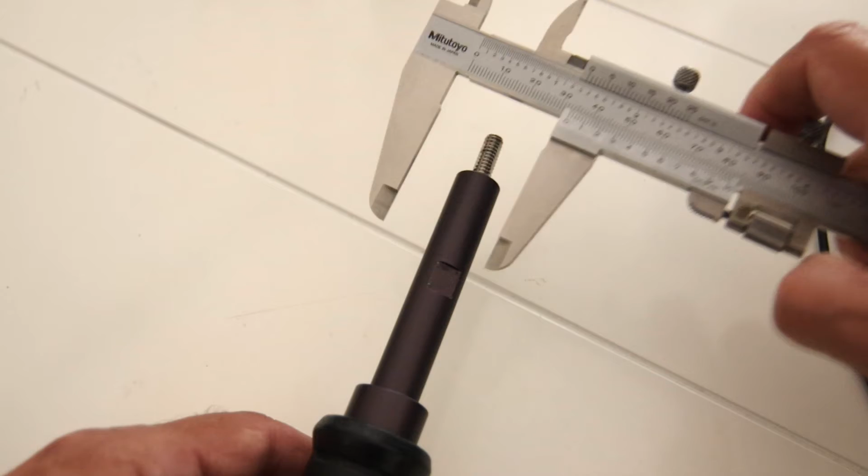I'm going to make the outer dimensions 25 millimeters in both directions, this way and this way. And my phone, with the cover on it, the protective cover, it's 78 millimeters. So we've got 25 by 25, 78, and 15.2 millimeter inner diameter for the hole.

So let's just start with a cube. I usually have my interface laid out like this so that when I'm making something larger I can gauge how it's going to fit into my print volume, but we don't need to see that. I'll also turn on screencast keys so you'll be able to see down here what I'm doing. And let's add a cube.

Cube is 2 centimeters by 2 centimeters by 2 centimeters. Now by default Blender's measurement units are in meters. I change them to centimeters because when I'm working on items or parts I'm making, meters is just too large, so I just change it to centimeters.

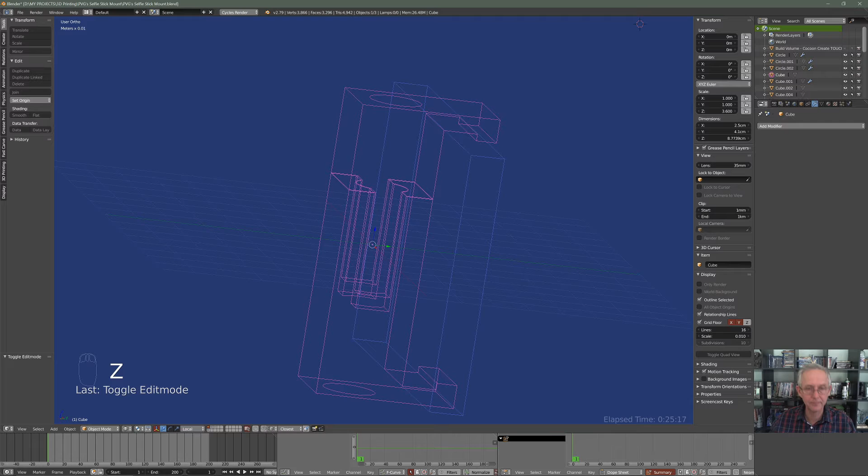Okay, so what's just happened is I've spent a fair amount of time making this up, thinking that OBS was recording, which it was, but it was just recording a blank screen. So I might go back and redo this to show you how I did it. I don't really want to, I'm just running out of time.

So I think for this one, I'm just going to have to explain what I did, and that was to create 2 cubes, 2 20mm cubes, made them 25 millimeters to fit onto this.

So this shaft, I need a 15.2 millimeter hole to cover this shaft here. I'm going to give it 25 millimeters outside dimensions as a cube to go over this shaft, and my phone will mount onto this like so with this bracket I'm designing here.

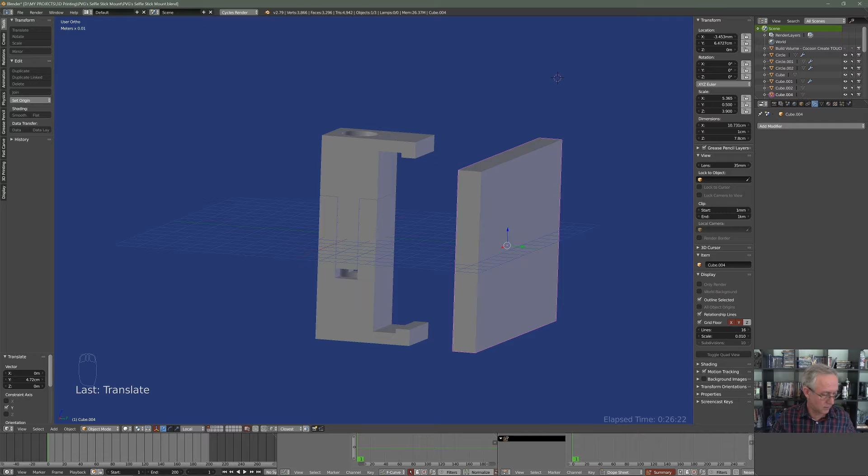I've designed it as two pieces so that one slips inside the other, and there's room here for the two pieces to slide into each other. It's very frustrating, I'm very sorry that that didn't record.

If I get time at the end, I'll redo this to show you what I did. I'm just going to select those two pieces and make them separate pieces so you can see how that's going to work. Both of those will slide over this shaft and then clamp down onto the phone.

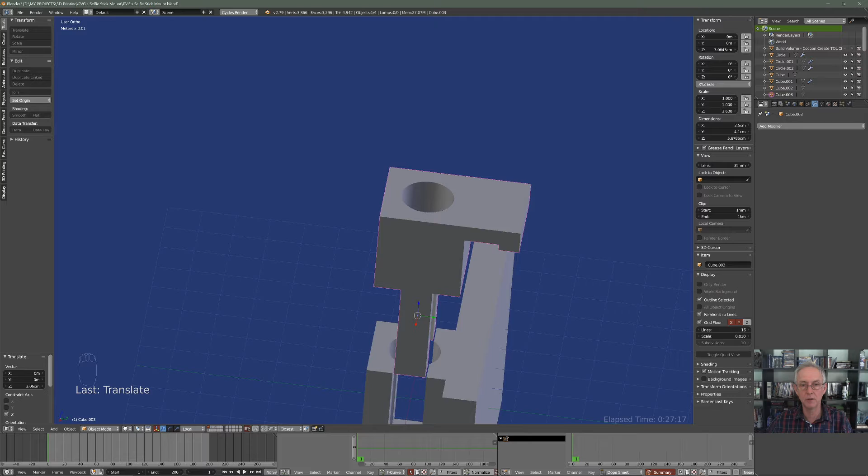Now I need a smaller hole at the top here, because this only needs a 7 millimeter hole on the top to put a nut onto. So I'm going to have to put some geometry into here, building in another cylinder, which I'll do now.

So I'll create a cylinder. I'll make it 18 millimeters diameter, and I'll give it a depth of 5 millimeters.

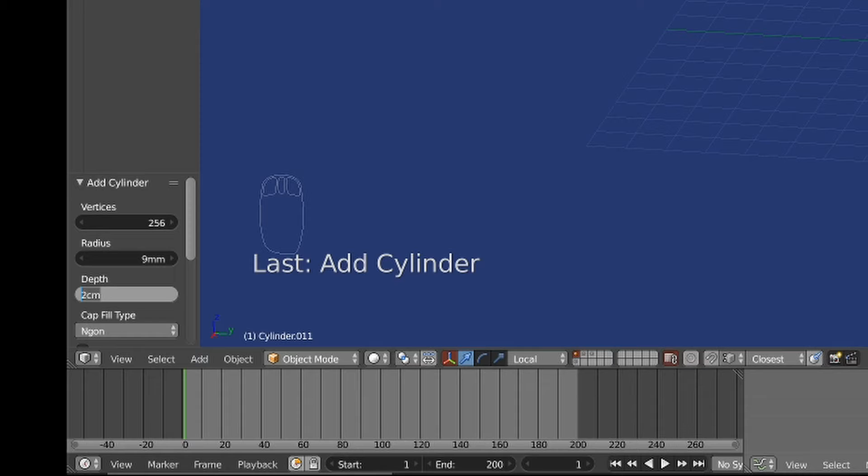And we'll press Alt G. I'm going to snap it to the top of this. Turn on my vertex snapping tool, GZ. Well, now that's snapped in there.

And I'm also going to create another cylinder, and this one will have a radius of 3.5 millimeters to give me a diameter of 7 millimeters, and depth will be 10 millimeters. Alt G, snap it back to 0, and I'll take it up there, and this will be... turn off my snapping tool.

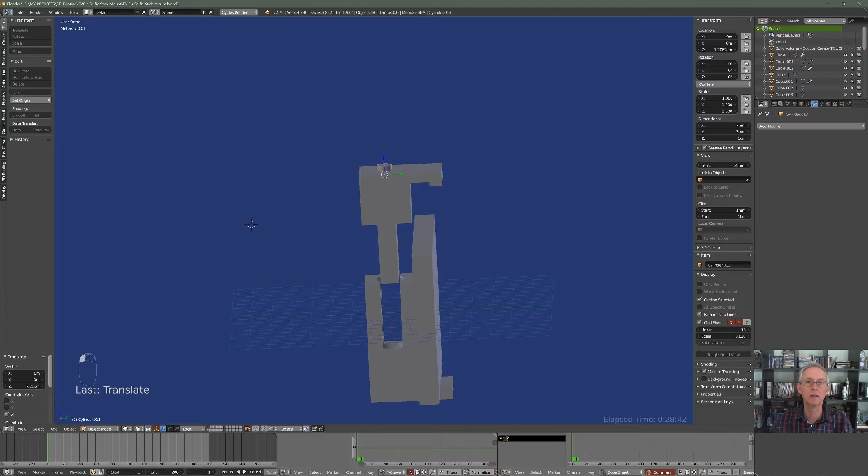I'm going to grab these two pieces, just focus on those. It's just the / key on a numeric keyboard that will focus on what you've got selected, and / will take you back to where you were. So I want to take this piece out of this and then boolean it into the other piece.

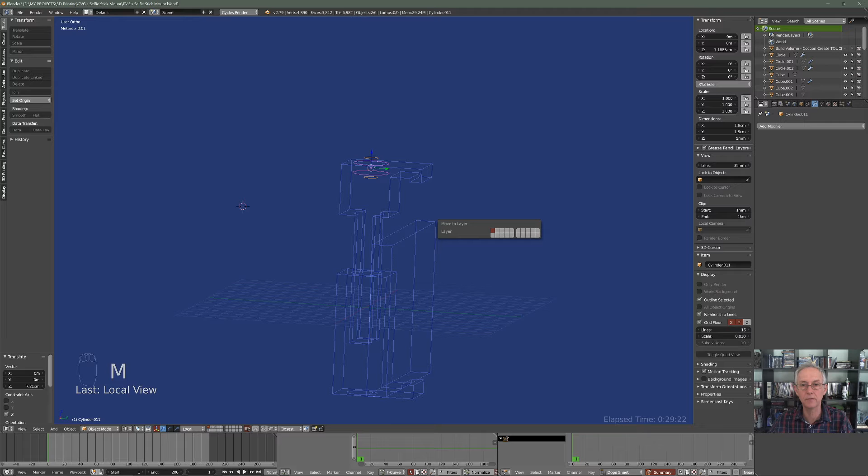So let's see, is there an easy way of doing this? Or another way? I think this might be a better way actually. We'll go back out. I'll move them to another layer for now, so they remain in position. And what I might do is put some geometry in here.

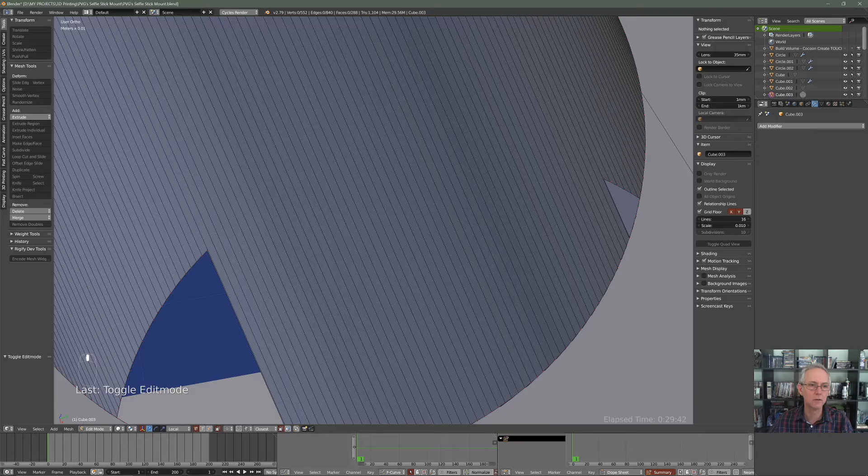First I'll see if I can join these two together. Yep, that'll do, that's fine. We'll do the same here, just pressing J to join those. So now I need to scale them to 0 on the Z axis, SZ0, and same with this one.

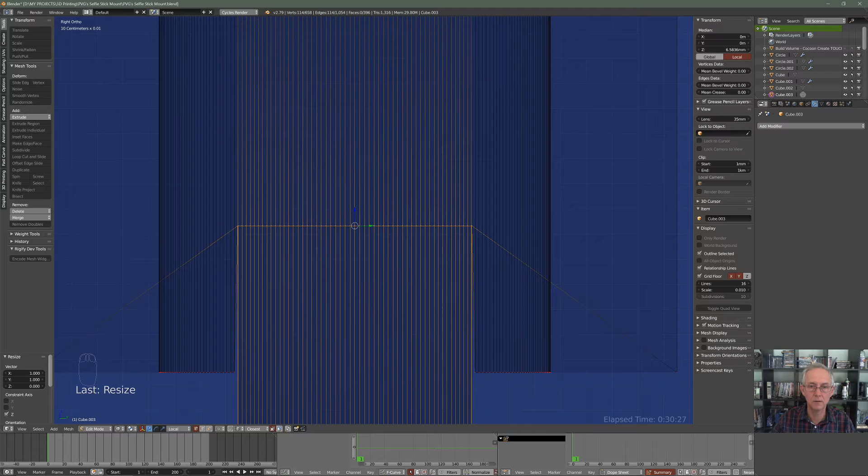Now I need to bring them both down to snap to these vertices so they're back where they were. And they're a bit different, SZ0, they're the same. Turn on my snapping tool, GZ, and snap to these guys. Okay, so now that's got geometry there.

So now I should be able to do a loop cut in here. I don't know why it's not joining up, but we'll have to do the same thing again. And join those. Join those.

There we go. Now I'm going to snap that to this plane here. GZ. Oh, okay. So now I've got some geometry which is holding.

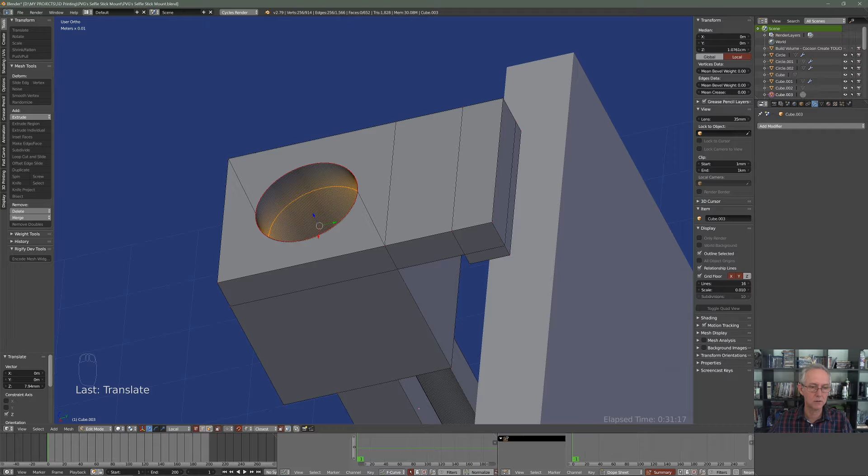What I can do is delete all these faces. And I can select that and fill that, and select that and this and fill that, which means I now can remove these. Control X.

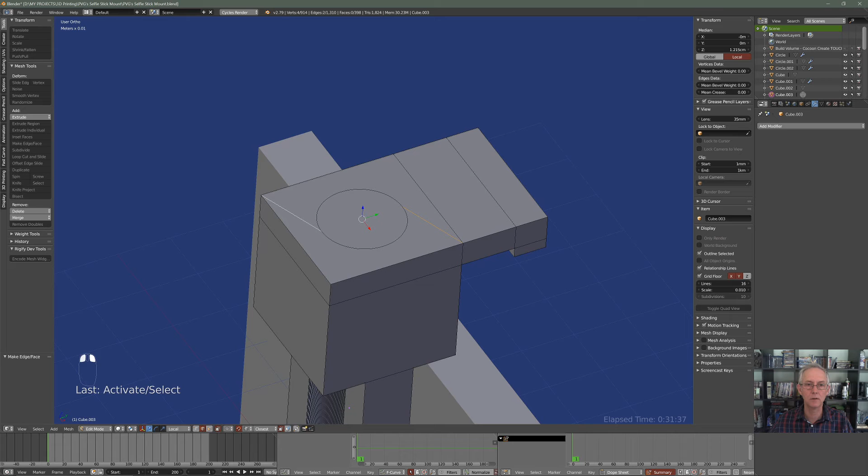So I've got a clean face on top there, and if you're looking through here, there should be a face on here. So now I can just boolean straight through this, and that will work quite nicely. Okay, so now I've got that.

Well, I am going to make sure all my normals are facing in the correct direction. Something you should do when you've been jiggering around and putting geometry in and what have you. Make sure my scale is at 1 on that.

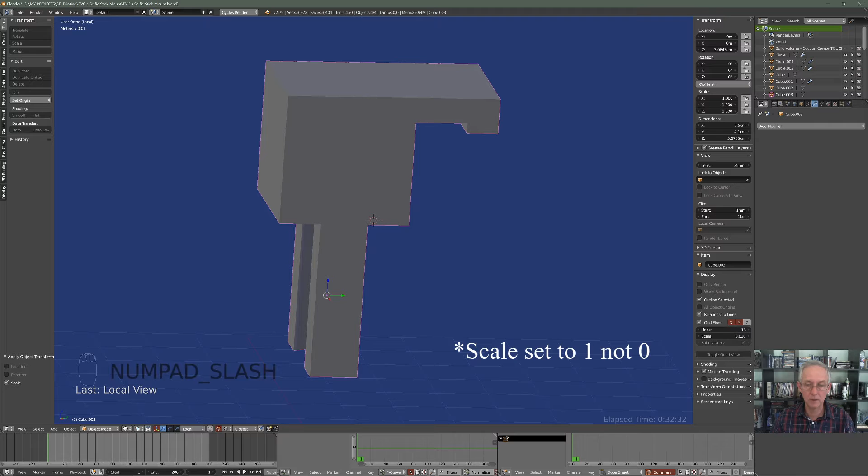I will now bring back my other pieces, or at least just this one here, and move that piece back to the first layer. That's going to be my tool for cutting out a hole in there. Okay, just make sure I'm still recording. I am, thank you. And I'm going to make sure the scale's applied to this cylinder, select this piece, add modifier, boolean, difference, carve, and select this piece as my tool for cutting, and that's now cut it straight through.

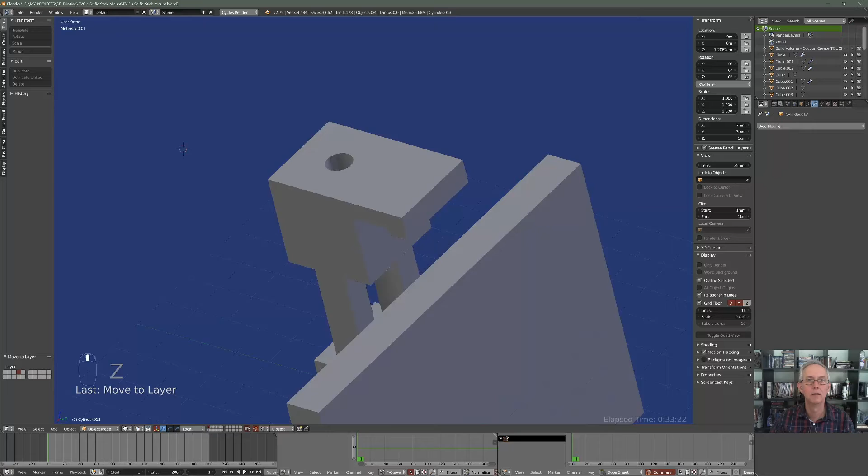So that will then sit on top here, and I can put a nut onto that and just lock it down. Okay, I'm going to apply that, and I can move that tool back to layer 4 so it's out of the way. So now we have our top piece which will lock down, and that should work quite nicely.

And this is just a piece I've got in here to represent the phone dimensions. So it'll come down, whoops, turn off my snapping. It'll come down and just clamp down the phone like that, and I've got a bit of room here, so it will clamp down nicely.

Alright, so I think we're pretty close to being ready to print. I would like to make this look a bit more attractive. That looks a bit ugly, I think. So just going to round off a few corners.

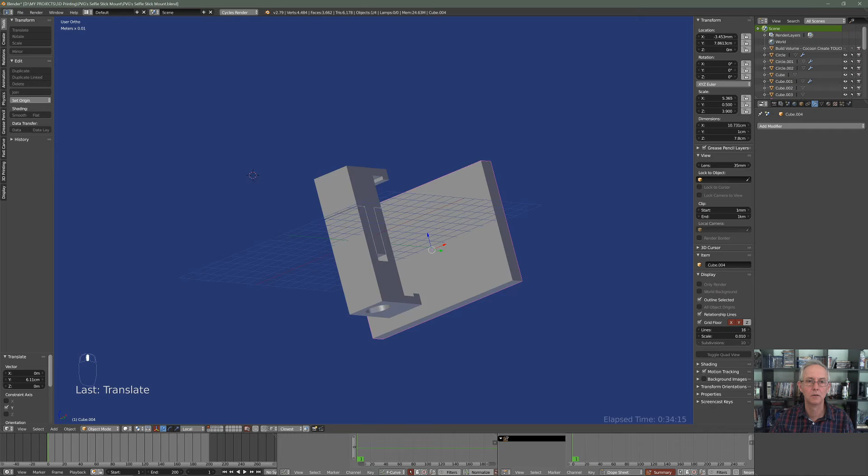I think I'll round off these ones here. Yeah, I think that'll be enough. Yeah, let's just see how that looks. Going to join together and apply to scale and select.

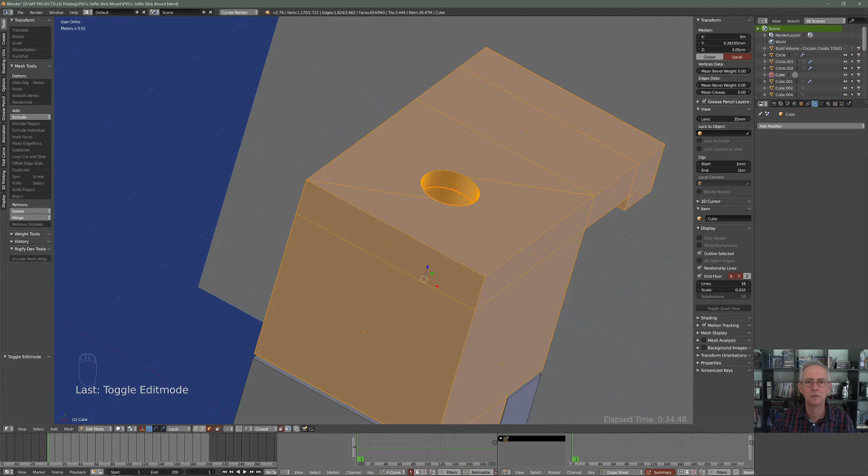Now I want to get, this is going to cause me a problem if I try to bevel. So what I might do is put a loop cut through here and a loop cut through here, and then we'll take this vertice.

Switch to top view, and we'll join that across the top there, which means I can get rid of this one, and we'll do the same here. Join that, which means I can get rid of this one, because that's going to hold that in place. And I'm probably going to have to do the same down.

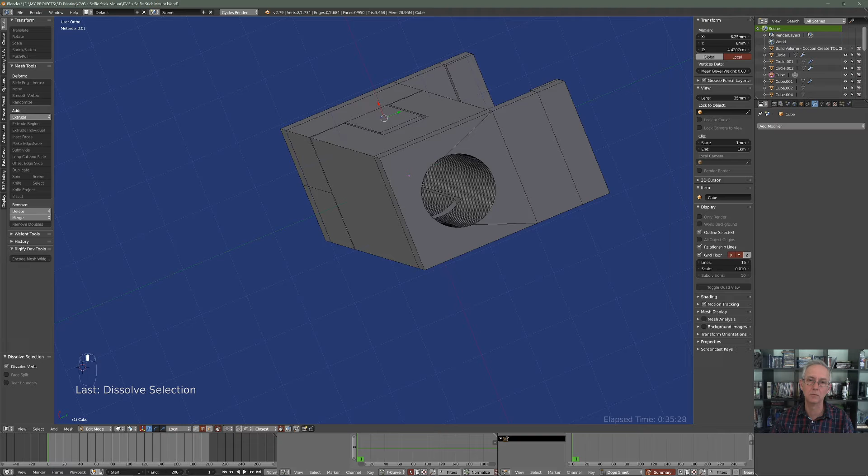Yeah, I'll do it anyway. Just put a loop cut through there, loop cut through there, and I'm going to go Control 7 so we see the bottom view this time.

Make sure I'm on vertices. Join across there. Yep, that's alright. Control 7. And go to there. Join that.

Okay, and so now I can delete these two edges. And that's cleaner geometry. Do a save.

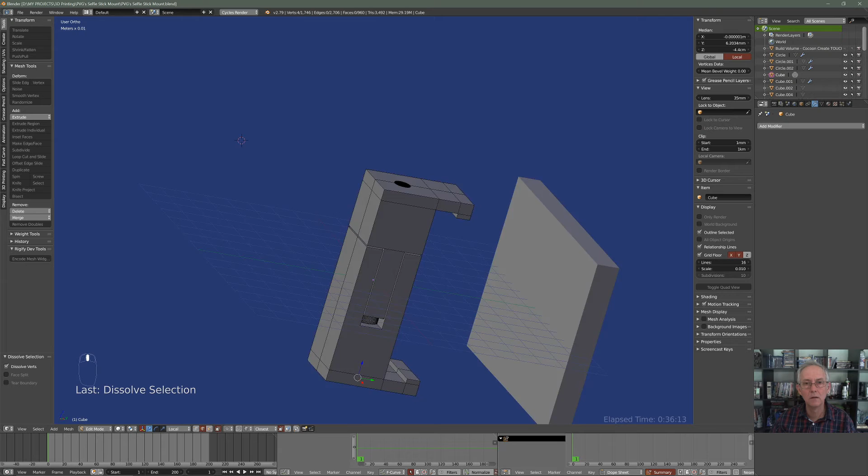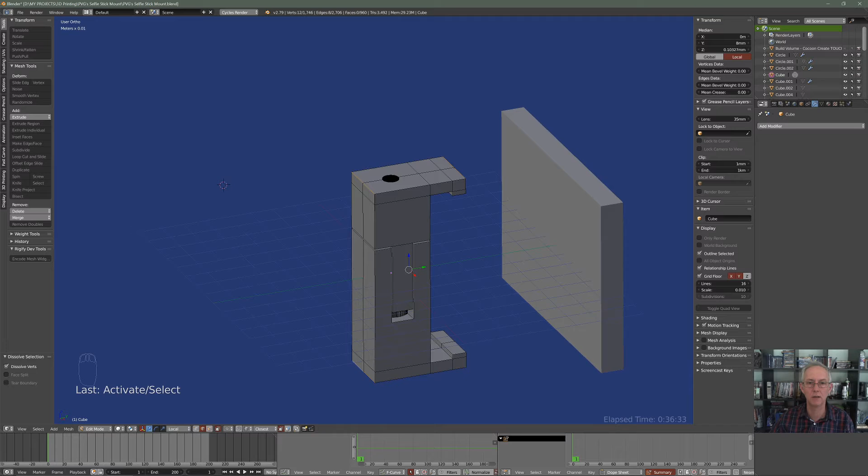So now what I can do is select these edges, and I might use a modifier to do this. I was going to just press Control B and permanently create a rolled edge on there.

But if I use a modifier and use a bevel tool and use weight on these edges, and if I give those a weight, see if I drag that, it's going to give them a 10 centimeter bevel, but that'll be a different scale to what I'm working on here. Let's make it a 3 millimeter bevel, and this is just giving it 100% at 3 millimeter. If I go 4, we should see a difference.

No, looks like 3 is just max. Oh, got to clamp the overlap, that's what's happening. So there must be overlap here somewhere. No, that looks fine. So I could go 4.2 millimeters and still be fine.

And I can also then up the segments. We'll give it 36. And you see it's now put a nice curve onto that shape, which is adjustable. I can go back at any time and change that.

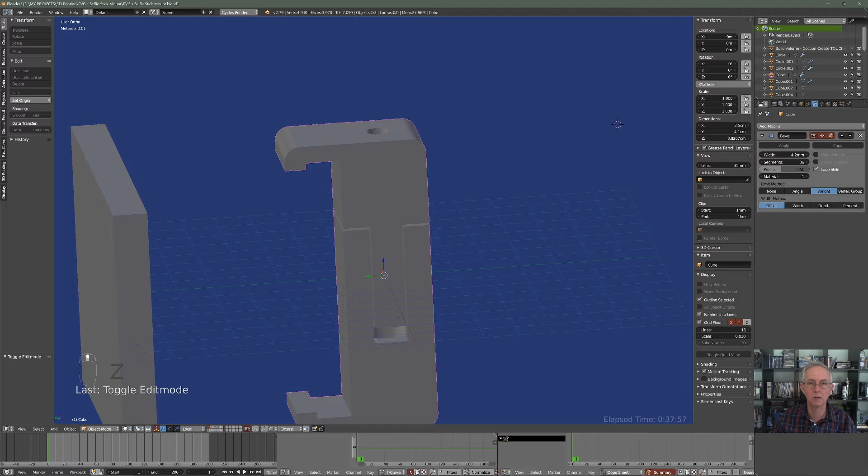Now let's have a little look. I think that's going to be a nice bracket. Certainly going to be sturdy enough. My phone's not going to go anywhere. I'm going to just leave those edges hard inside there, so it's got a good grip. And yeah, I think that'll be good. So we'll print that, just double check everything.

No, I was thinking about separating them, but what I'll do is I'll just duplicate that, move that to layer 5, so I can come back to it, make a change later, and apply this bevel now. Just looking at the sections, how many sections?

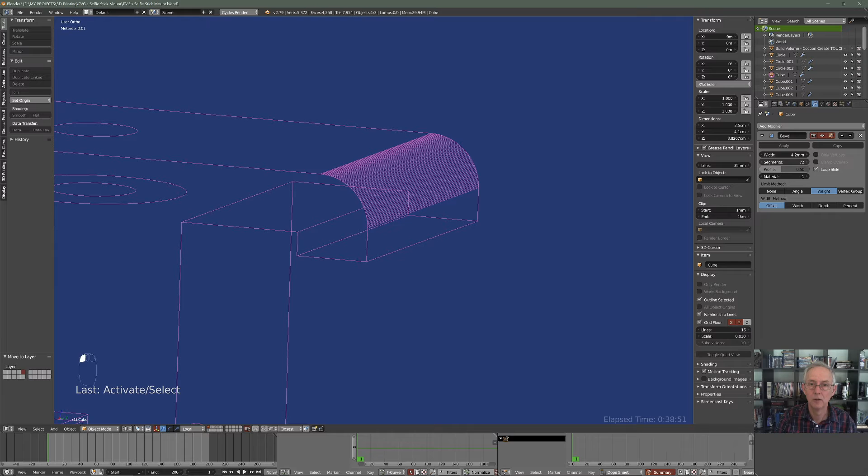I might up that a little bit more. 48. Make it 72, nice and smooth, and we'll apply that.

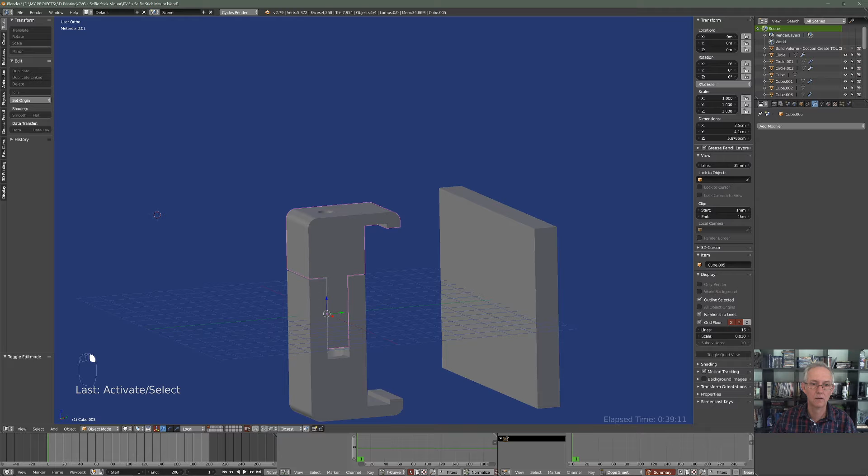Switch to object mode and apply. So now that modifier has been applied, I can deselect everything, link that, separate that off by selection, and move that apart.

Now printing, I think it's going to be easy if I just print them in this orientation as this piece is here, and flip this one over. RX 180, and I'll make this piece, this plane here, the bottom.

Going to move the cursor to selected, switch back to object mode and Control Alt Shift C, and we'll go origin to 3D cursor. I'll do the same for this piece here.

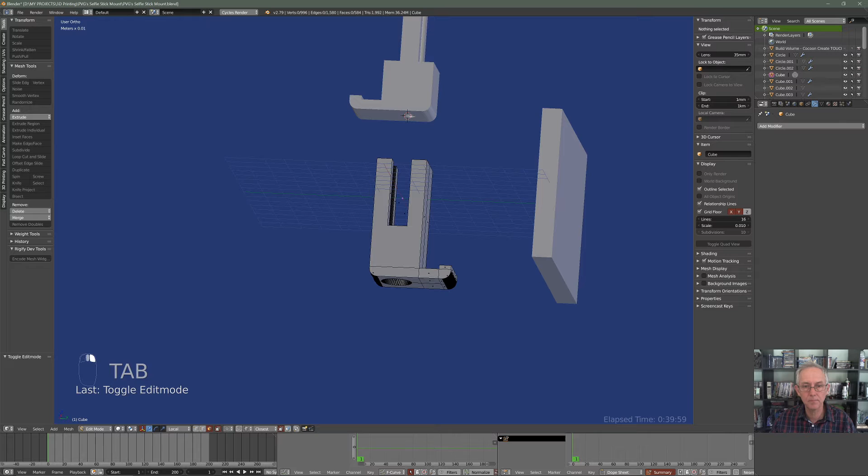Now this is not a tutorial like that I'm expecting you to follow along. This is just showing you how I do it, and you might pick up some little clues on how you can speed up your own workflow.

Now if I press Alt G, that'll snap to the floor. Alt G, so will that, and I can print them as 2 separate pieces or 1 piece, or whichever. And I think we're ready to go. And that's our bracket for holding the phone on.

So let's delete that. Let's take this out to Cura. I did try Cura, actually I'm still recording.

I did try Prusa Slicer. I've been using Cura up to Cura 4.2, whatever it is now, and I did try give Prusa Slicer a go, and I initially thought I was very happy with the way it was slicing and the speed it was printing at. But then I did notice that I did a print in Cura 4 and a print in Prusa Slicer, and I'll zoom in and show you what's happening here.

But for some reason Prusa Slicer doesn't hold the same fine detail that Cura does, and I don't know if you can see these sections in here. This is the SpaceX Starship, by the way, which I modelled. These sections here hold up

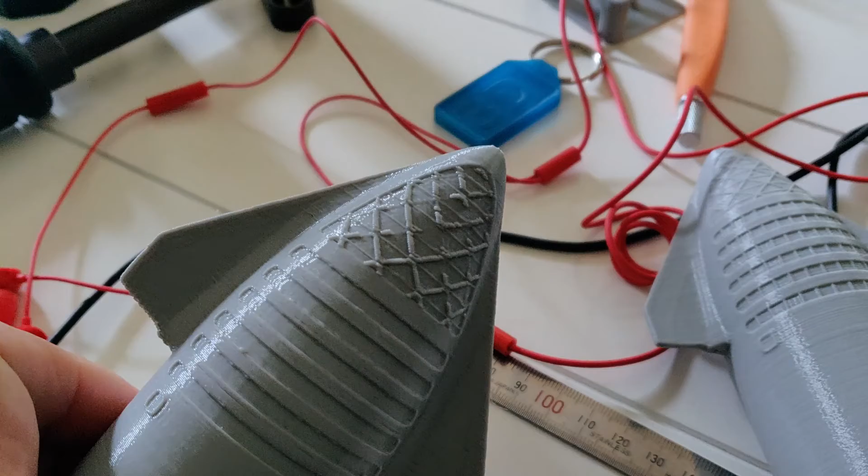So this is the Prusa Slicer, and this is the Cura slicer. You can see there's a fair bit of difference in detail that's been held up in Cura that's being lost with the slicer. And it's definitely in the slicing software, because I slice it and have a look layer by layer, and it's not there, where it is in Cura.

So if someone knows of a setting that will fix that, let me know, and I'll have another go. But yeah, I was quite surprised that I could not get Prusa Slicer to hold the detail that I can in Cura, so I'm going to stick with Cura for now.

So let's take this out to Cura. Sorry, it's Cura 4.4. I thought it was 4.2, but 4.4 I'm up to now.

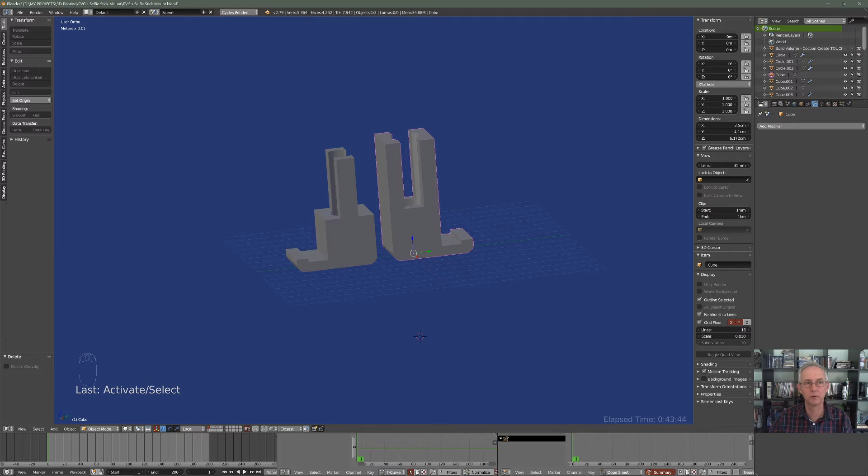And just double check, make sure I'm still recording. Good. Now I'm going to export.

I'll export them as separate pieces. So we'll go File, Export STL. If you come down here, I want to make sure my selection only is ticked. My scale is going to be 1000. My export scale, and I'm going to work on scene units, and I definitely want to have selection only, and it's going to apply any modifiers that haven't been applied.

So we'll go selfie stick, we'll go part 1, selfie stick mount, export that, and we'll go File, Export STL, part 2.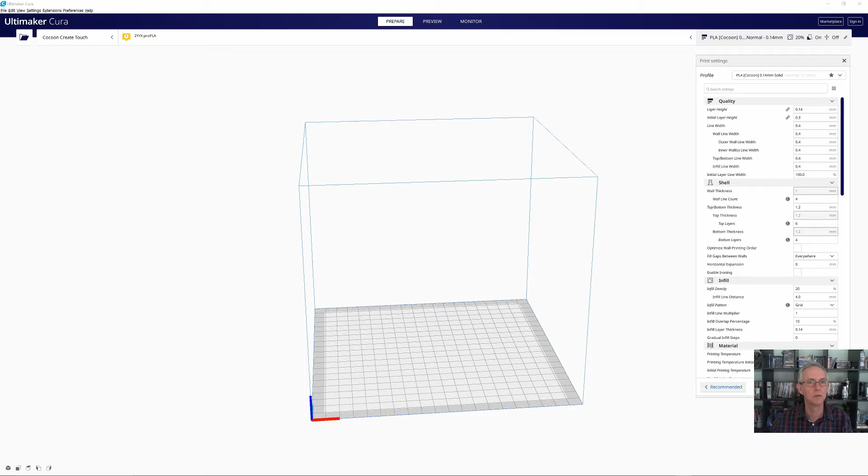I'll print one at a time, just so I can see how it's going. Now, we'll import that. File. Okay.

I'm going to want a bit of... I'll print it at 0.1. We'll go 0.16. And we'll do 4 wall lines, 4 walls for strength. Infill density, let's up that to 30%, again for strength. Printing temperature is 200, and no supports necessary. Tick that off.

Alright, so I'll just scroll down, and you can pause on this screen if you want to see all my settings that I'm using in Cura 4.4. So that section, again pause it if you want to see what those settings are. This is going to my Cocoon Create Touch 3D printer, and that's the last section there.

So let's have a look at this. We'll slice it. Oh, there's one other thing I do too.

Select the part. I changed my scale because I did a bit of a calibration test on my Cocoon Create Touch, and I just printed this little scale grid, which is 180mm from here to here on the X, and the same on the Y, and printed it out and then measured it to see if my print is 100% accurate. It's particularly crucial for parts that have holes at set distances apart. A little bit makes a big difference.

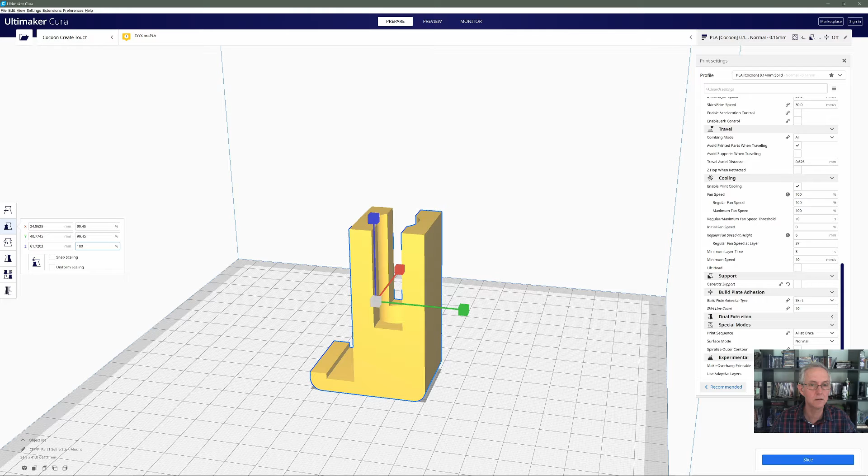So I've done that, and I found that my printer's out on the X and Y axis, and I need to set my scale to 99.45% on both those axes to bring it out at the correct scaling. So 99.45 on both those axes, and when I print that I know it'll be the right size, or the size as I modelled in Blender.

So check that. Okay, slice. 2 hours 17 minutes, that's fine. Let's have a look. That's going to see if there's any issues anywhere. I think that's looking good. Should print fine. Alright, that's good.

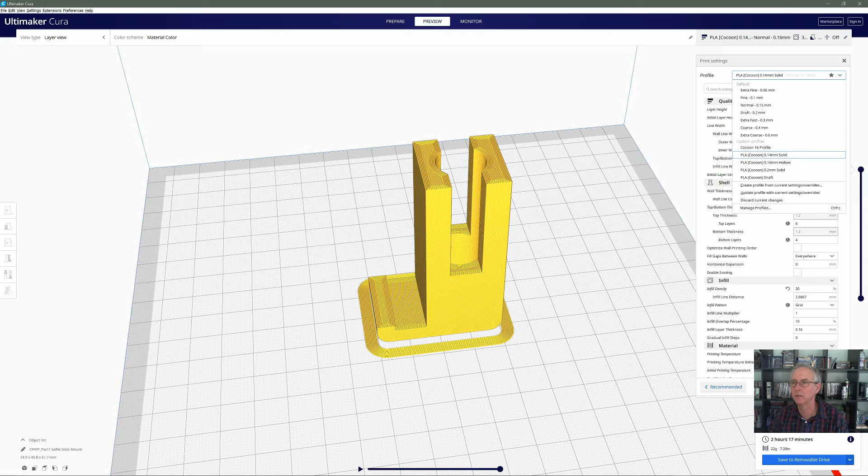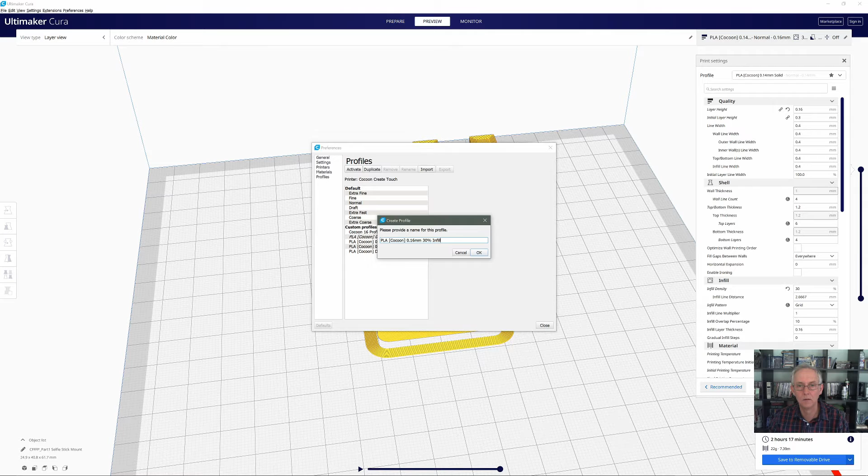So that's part one. I'll save this profile. We'll call it 0.16, not solid. 30% infill. So 0.16, 30% infill. So we've got that as a preset.

So I've got a new project. Yes. And we'll open that second part. Scaling will be 99.45% on the X and Y for my printer.

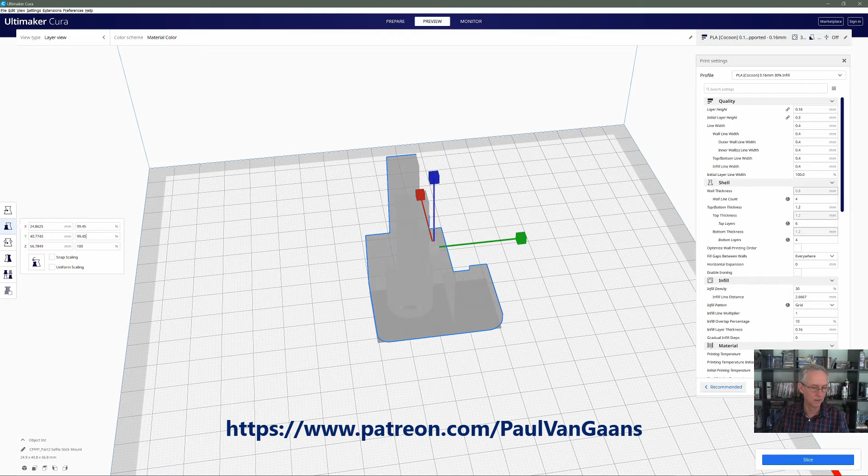So, but anyway, let's get back to this. I've changed the scale. Let's slice that. All my settings should be the same as before. Slice that.

And we'll just do a little check. All looks good. Yeah, this is the top, so it's smaller. Should print nice. Alright, we'll save that. And we're ready to go to print.

So let's head over to the printer. Actually, I think this system is going to work out well. So I can show you stuff that's been happening as I go, because like in this instance here, you can see this, all these bits of filament. Just this roll that I've got of it's the Cocoon Create PLA.

I'll do a print, and then the next day when I come back to the printer, it's snapped off, and it just keeps snapping off into pieces. It's weird, it prints okay. It'll do a run and print no problems, but then overnight it just snaps off into pieces, and I've got to then remove it out of here and load more filament.

The problem is I've got loads of this filament, and it's the only filament I have, which is a Cocoon Create filament. So I suspect it's the filament. I don't know if it's just an aged batch, because it's very stiff and it's tightly wound onto the spool. I don't know what it is, but I'm keen to try some different filament and see if that's going to be any different.

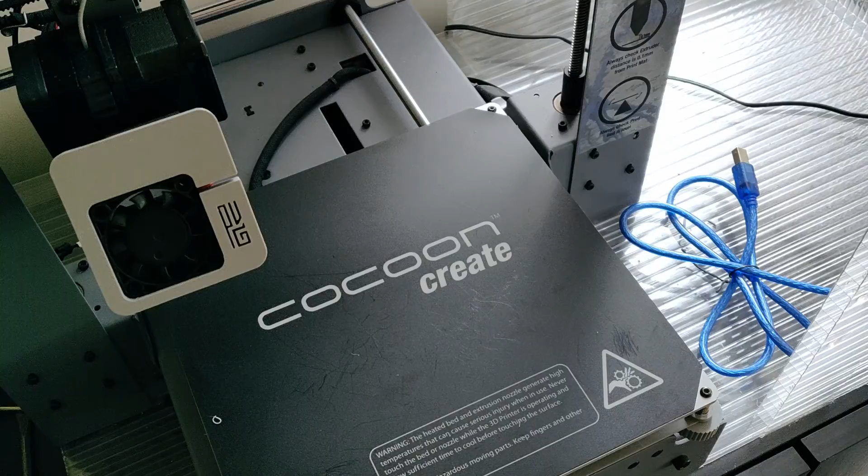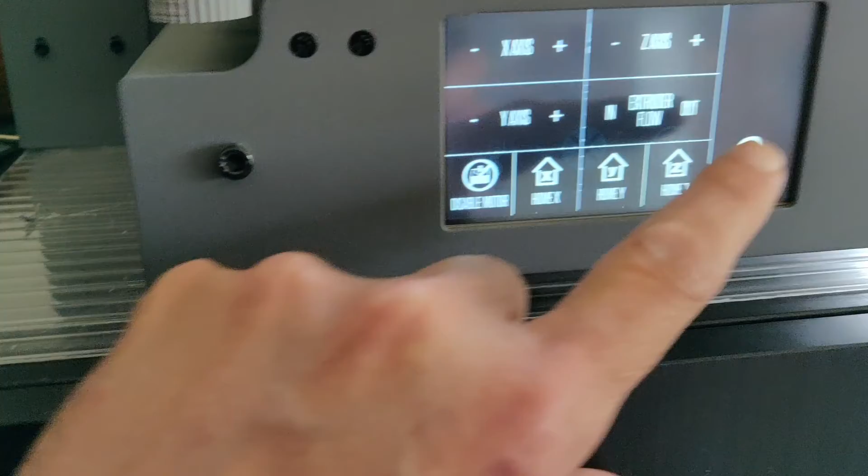Alright, so let's load up this SD card and get a print going. But first, I need to fix this filament issue. So, quick menu - that's not the one. Change filament, remove filament, go set to 210 degrees.

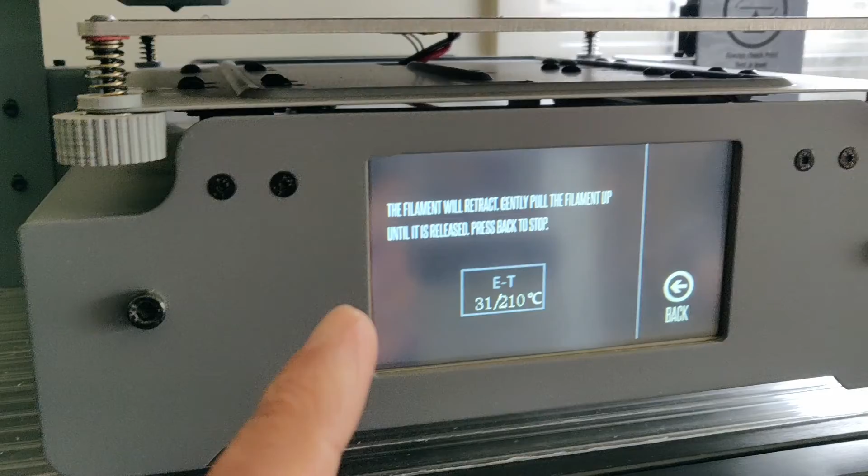And while that's warming up, I might just show you my settings for, well, the G code, the start and end G code that I now use for this printer. Yeah, so my G code for - let's see if I can find where it is. Manage printers, machine settings, okay.

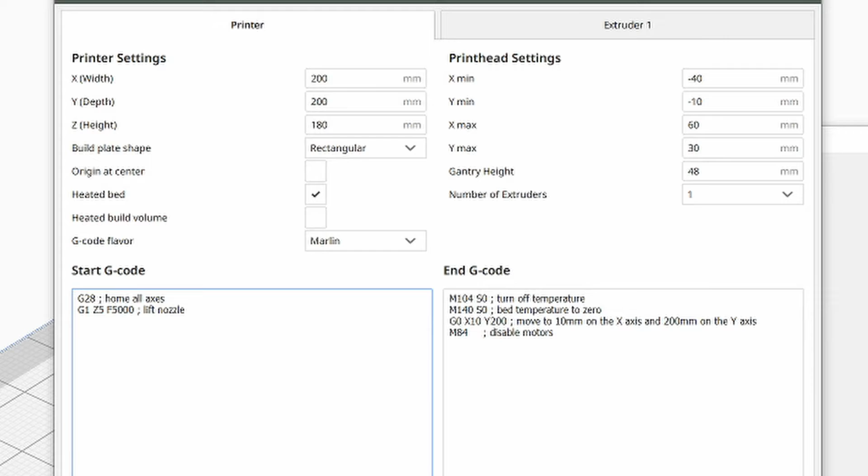So you can see now my start and end G code is pretty basic, and I don't know if that's a good thing or a bad thing, but I just find it's a much more efficient way of finishing a print and starting a print. It's a lot quicker than the G code that came with this printer, and I'll show you when it's printing and where the bed starts and finishes, and I like it so much better the way it's set up now. So I'll put this up on Patreon, the start and end G code, just as a text file, so that you can try it yourself.

But try it at your own risk, because it works on my printer and it may not work on your printer. It may send the head off in different directions, so just be careful. But yeah, this is a G code I'm using, and I just find it's so much more efficient.

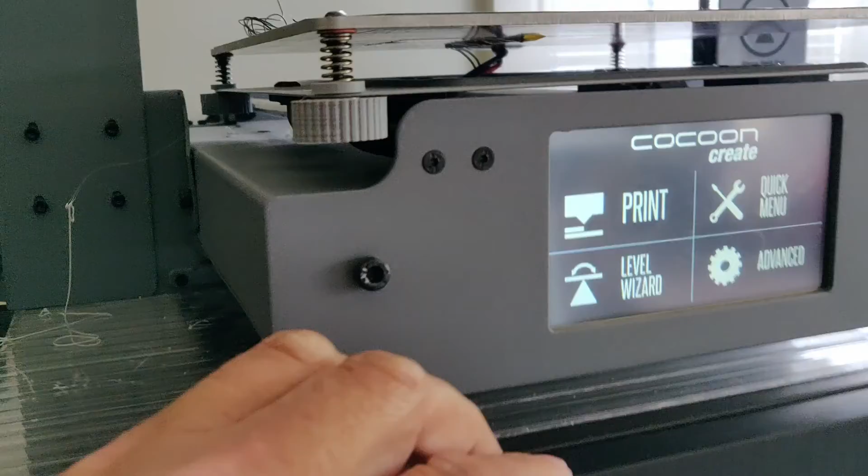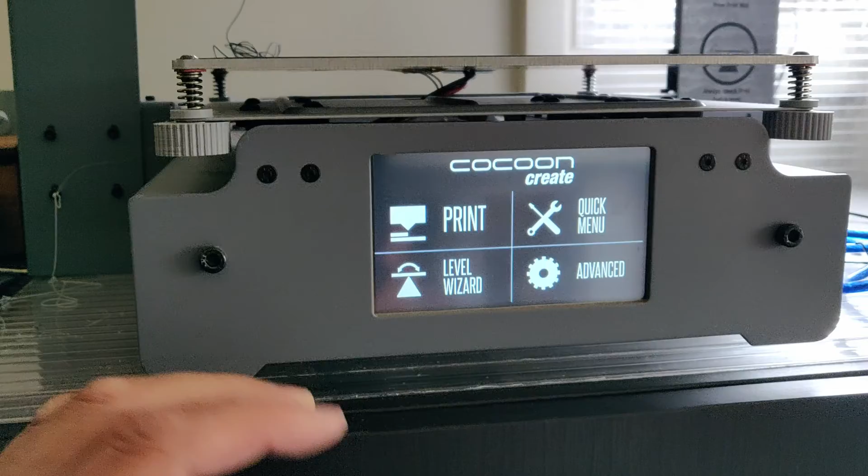The filament is now extruding out of the print head, so let's go back over here and get that sorted. Now, I've been having some issues with this touch screen, or this printer, of late. Nothing that's caused me any - well, I've had issues with the extruder and nozzles, which I've replaced those.

But when I hit print, you might see it here. Yeah, see this little glitch on the screen here? It started doing this a little while ago.

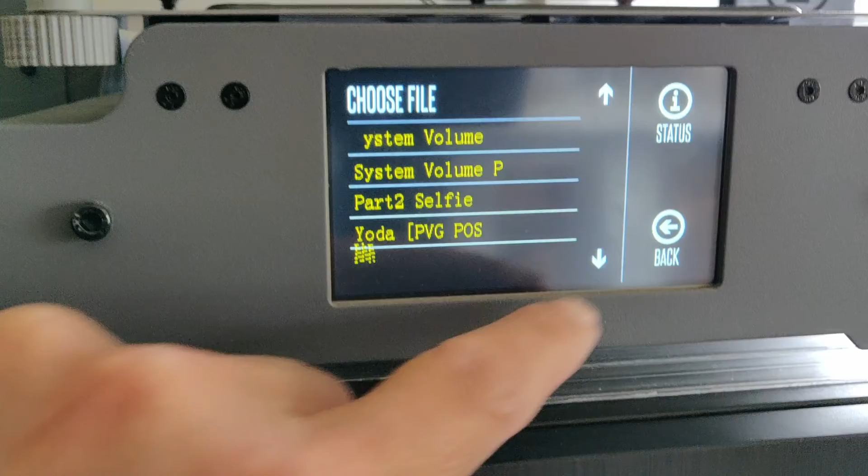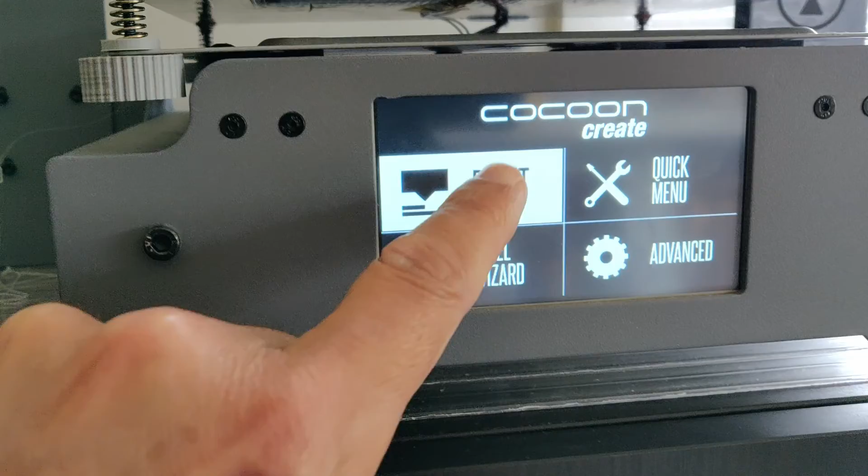Sometimes if I try, say if I print, we'll do part 1 first - the selfie stick. There you can see here, the extruder temperature is not going up. The bed temperature is set, but the extruder's set to 0. So what I need to do is press stop to cancel the print. Print, go status, stop that again. Print, try part 1, and now see, now my temperature's reading correctly.

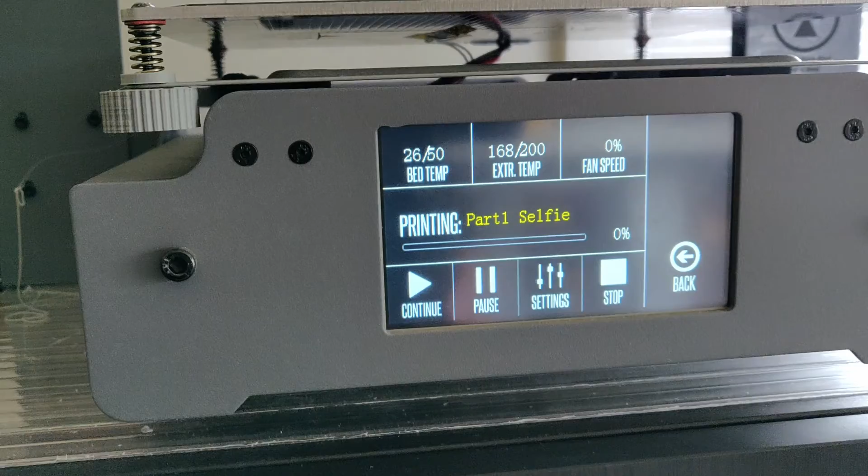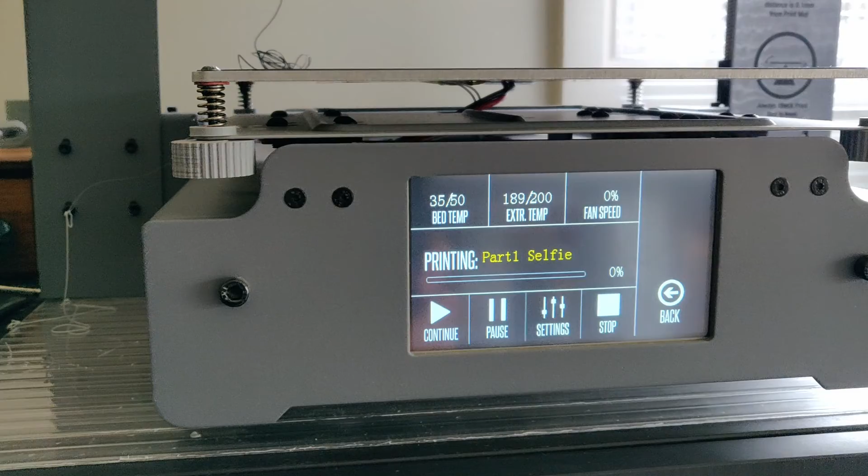So I don't know, it's just a glitch that's sort of crept into it. It works fine from there on in, but just every time I do a new print, I've got to do that to clear things. It's one of the things that is playing up a little bit, but it's not enough for me to worry about sending it in to get fixed or anything like that. I'm happy to live with that - it doesn't worry me, but it's just something that's crept into it.

So what we'll do now is that's going to be ready to go in a very short order. So might just give that a quick go over if I've got time - it's 42 of 50 degrees, just with a bit of isopropyl alcohol.

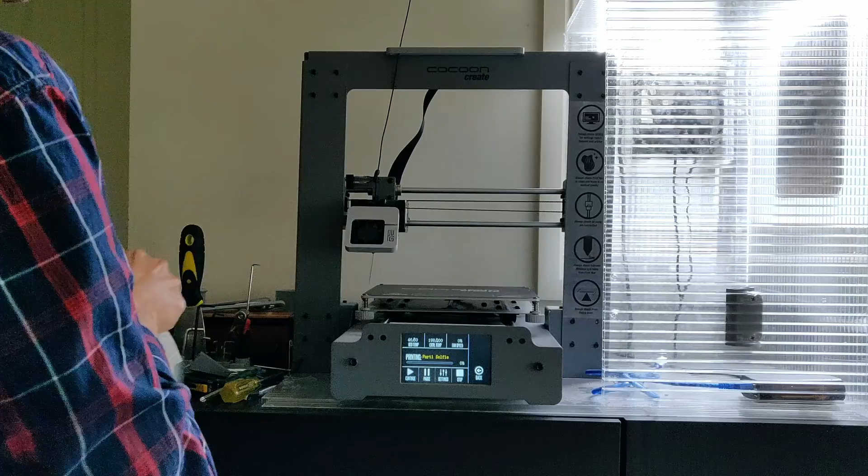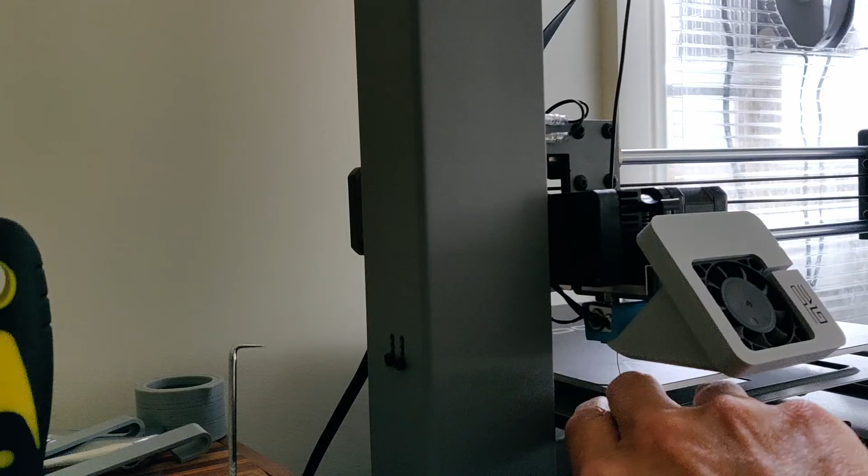Got that in. Now you can see there, the G code I have, it just basically comes over and gets itself sorted, started, and then goes straight to print. And when it's finished, it positions the print head over here with this new G code, and just spits the bed out here so that the part's really easy to get off.

Prior to that, what would happen is this print bed would go to the back of the printer, and your part's going to be back in here, and then the print head comes all the way up to the top. So I think the G code I'm using now is much better, I like it a lot. So let's print away, and I'll come back in a bit and we'll see how it's going.

Right, that's printing nicely. Let's head back over to the computer and I'll show you that shoe project I was working on.

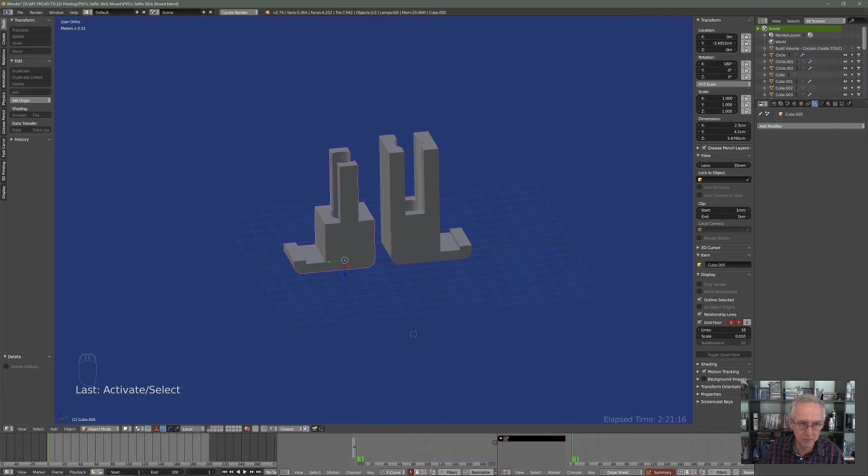I don't think I'm going to have time to show you the steps that led up to this point, but it was basically: I created a cube first and then a cylinder, used the carve Boolean modifier to remove this geometry out of the cylinder, and then created this piece here, which was just a piece to cut out a slot shape so the two parts can move independently.

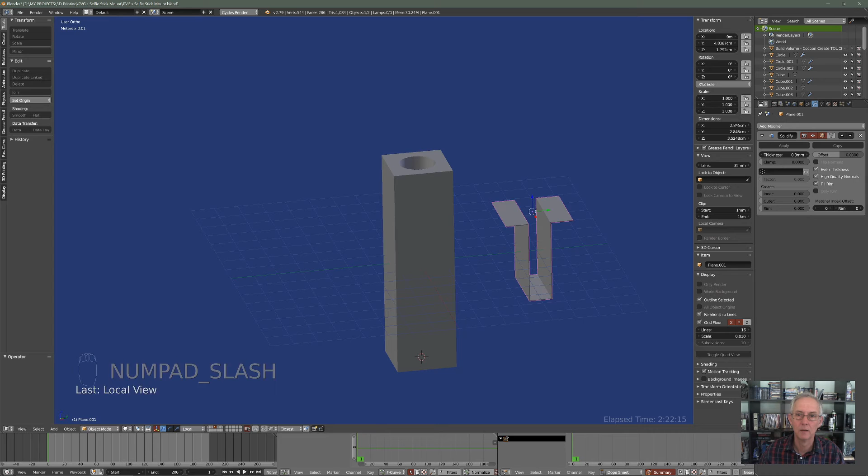I put it's just a flat plane with a solidify modifier on it, and you can see that if I turn this modifier off, it's just a flat plane, that's all it is. So then I used that to Boolean this into two parts, which gave me this shape. So that's all I did for that.

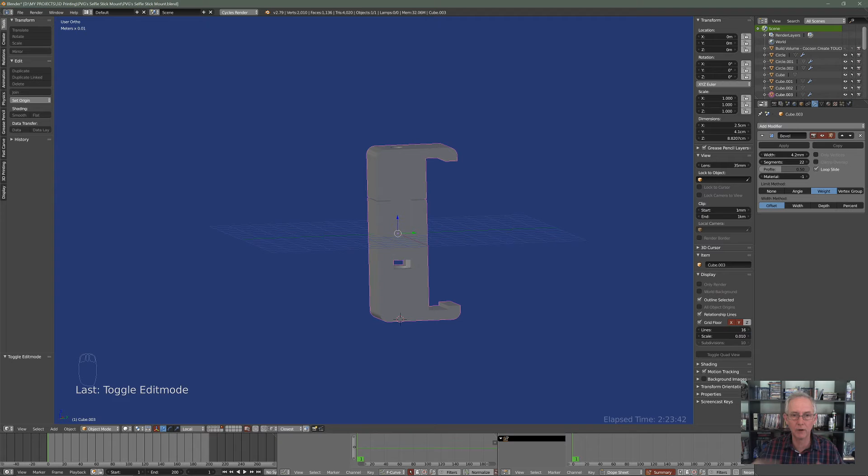I will do another video recreating exactly what I thought I was recording earlier, but I'll do a different model. I'm not going to have time to do this today, but we'll do the same format on another model, and I'll run you through all the steps I used to create something like this, so you won't miss out. For now, I'm sorry that I lost that footage. Well, I didn't lose the footage, I thought it was recording, but it was recording a black screen, so it's got my voice but no vision.

All right, let's see how the print's progressing. So that's it, really all I have to do now is just wait. I'll print the second piece once this one's finished printing, and come back to you once the part's ready to go.

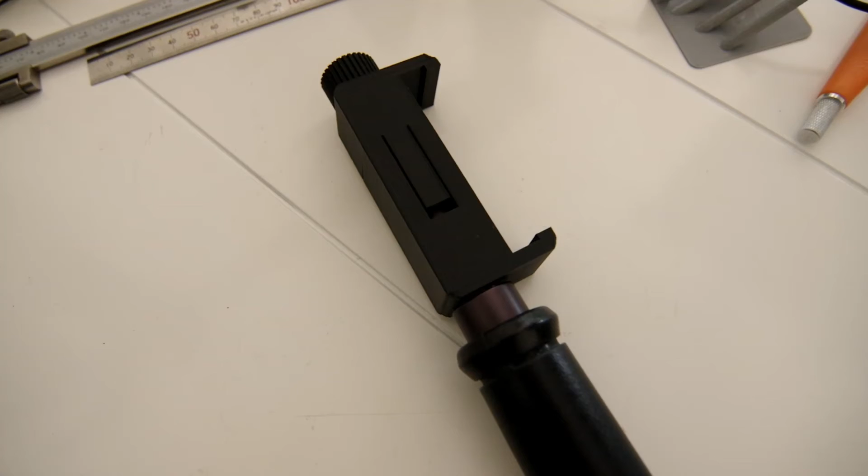So this is the final product, and I must say I'm really happy with the way this came out. The print finish is really nice, the tolerances are all perfect. I can't fault that. Everything fits together nicely, it's come up really well, and it functions fantastically.

When I put a phone in it, I don't have to back the knob all the way off, I just have to loosen it a little bit, slide a phone in, and it's good to go. I will show you that in a tick. It'll be one-handed because I'm holding the camera with the other hand, but at least you'll get an idea of how it goes together. It just slips together.

I did model a knob for this nut at the top of the unit, and I will play that video at the end of this. So if you want to see how I modeled that nut, stay tuned. I was originally going to have a captive nut embedded in the knob, just pause the print, drop the nut in, and keep the print going, but in the end I decided for the simpler approach, and it works fantastic.

Works really well, I only have to back the knob off a little bit to slide the phone in, and it just works fantastic. Overall I'm very happy with the way this works, and I've been using it a lot, and I will be using it in future videos and for this and some of my other channels. I was very happy with that.

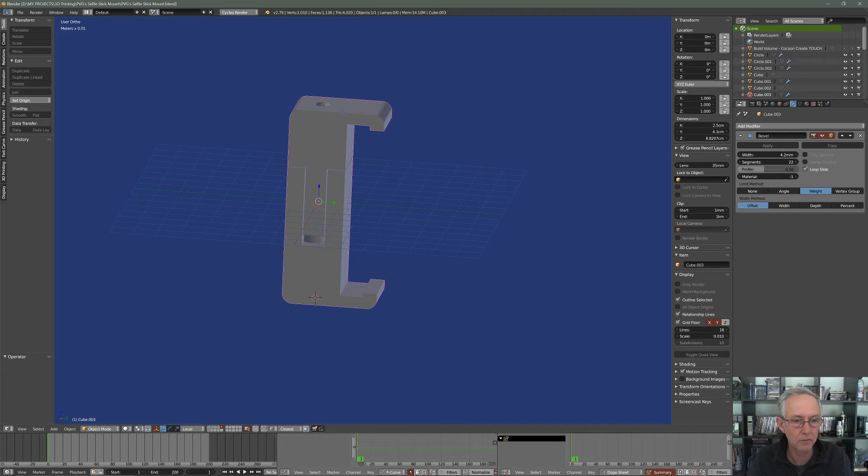So let's start modelling this in Blender 2.79. First thing I'm going to do is work on this layer, which is layer number 5. If I mouse over, you can see it's telling me it's layer number 5.

So we'll switch to that layer, and I will measure up this nut that's on top of this mount. I'll use my calipers rather than the small ruler. The nut is 11 millimeters by 11 millimeters.

Now, I don't think that hole in the center of the nut is exactly in the center — it looks slightly offset. So I'm going to give a little bit of clearance around the sides of that nut to ensure that if it's a little off center, it still fits in there all right. So I'll make the actual square shape inside the knob to hold that nut 11.5 by 11.5 millimeters.

And I think I'll make the outer diameter of that knob by measuring diagonally across the nut to make sure I've got plenty of room for my outer walls. I'll do that again, just measuring diagonally across that square nut.

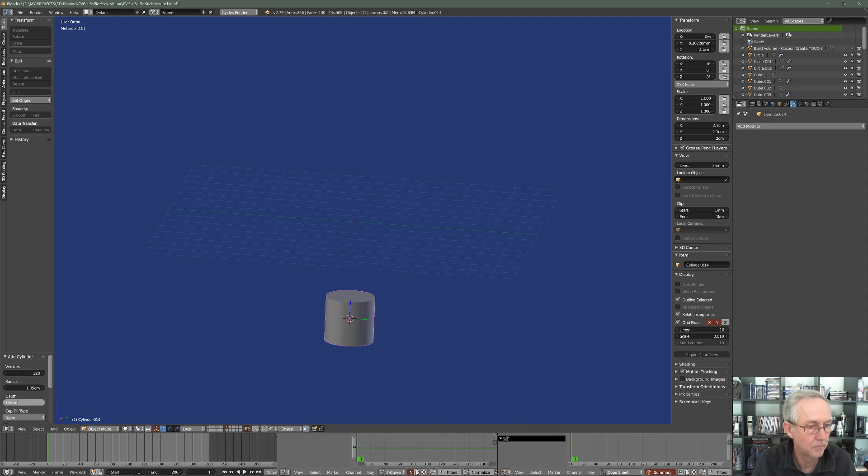Just going to create a cylinder, and we'll give the cylinder 128 vertices, that's 128 faces around the edge. Radius is going to be half of 21 millimeters, so that's 10.5 millimeters, and the depth I'll make 20 millimeters, just to give us a little something to hang on to. Okay, Alt G to snap it to the center.

Now what I need to do is make sure I've got, I'd say, a millimeter of base in the bottom of that. Should be enough — I'll make it 2 millimeters in the base. So let's create our shape now for the boolean to cut out of the center of this.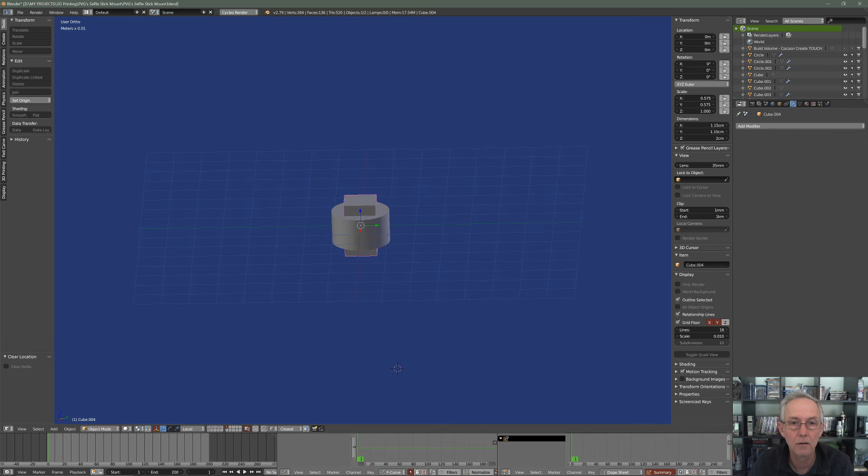We'll create a cube. I'm going to make it 11.5 millimeters by 11.5 millimeters, and Z can be 2. This is going to cut out of this shape. I'm going to make this face the pivot point of this object.

That currently is set to the center, so I'll go to faces — actually, I'll turn on screencast keys while I'm working so you can see what I'm doing. Select that face, Shift S, cursor to selected, switch back to object mode, and I press Alt Control Shift C, that's origin to 3D cursor. So now that pivot point is at the base of that cylinder.

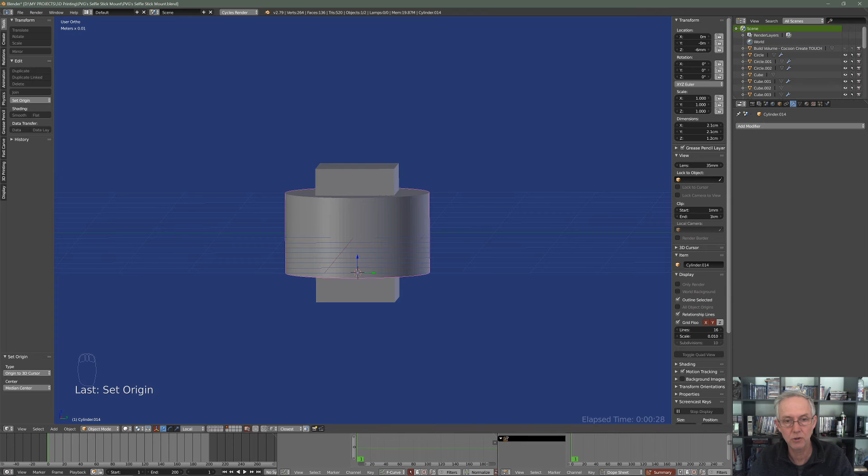So if I press Alt G, it's going to snap that to 0. Now I can do the same with this shape: Shift S, cursor to selected, back to object mode, origin to 3D cursor, Alt G. So now they're both at 0, 0.

So now I can just nudge this up 2 millimeters to give me my inner floor of this knob. So I'm going to press G, Z to snap it to the Z axis, and move it 0.002, which is 2 millimeters on my setup.

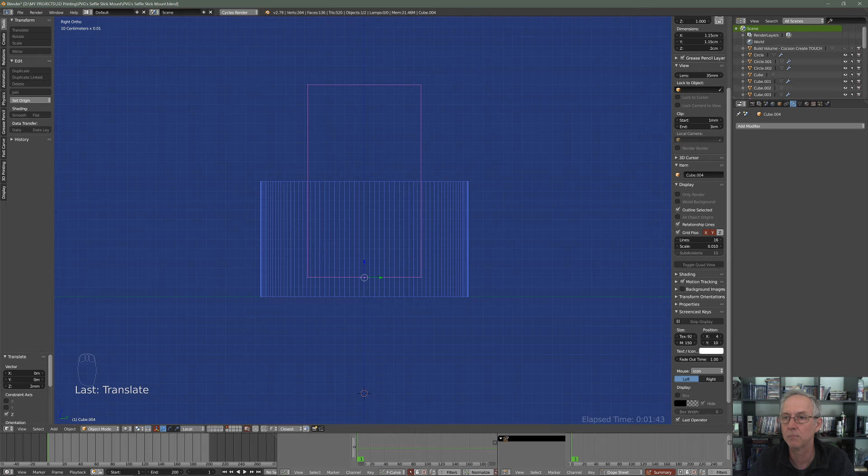I went with 0.002 because if you come down to your numeric panel, you'll see I have my display set to a scale of 0.010. By default, if I create a cube, it'll be 2 meters by 2 meters in Blender, but I want my default cubes to be 2 centimeters by 2 centimeters. So I set my display scale to 0.010, meaning when I create a cube, it's 2 centimeters by 2 centimeters. That's the scale we work with on 3D printers, centimeters not meters, so I do that by default.

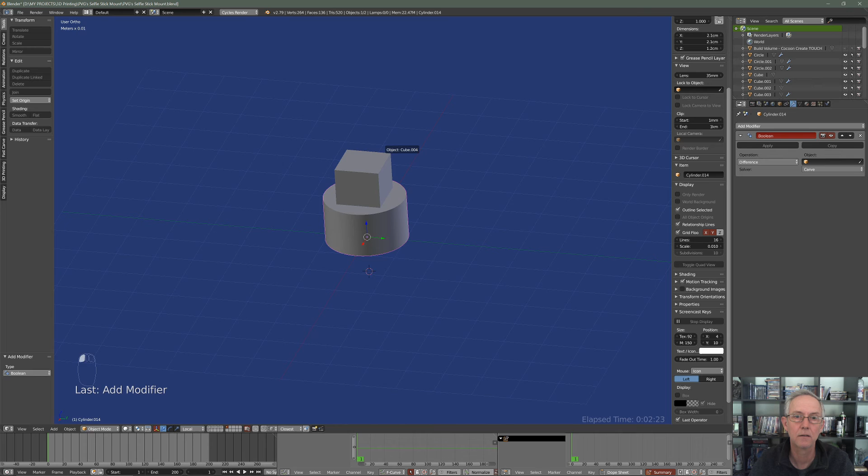So now I have that shape there. Let's boolean this cube out of this cylinder. I'm going to add a modifier, boolean difference, carve - I always use the carve boolean modifier. Select my cube, hit apply, and I can delete that now. That's the shape I'm looking for. So my nut will just drop in here.

When I twist it, it'll twist the nut, and it can't come out once it's onto the thread. That'll be fine for what I'm looking for, because I never fully take that nut off when adjusting this mechanism. I usually screw the nut up to about here, then that's all I need to slip my phone in and screw it back down again. So that's going to work fine for what I need to do.

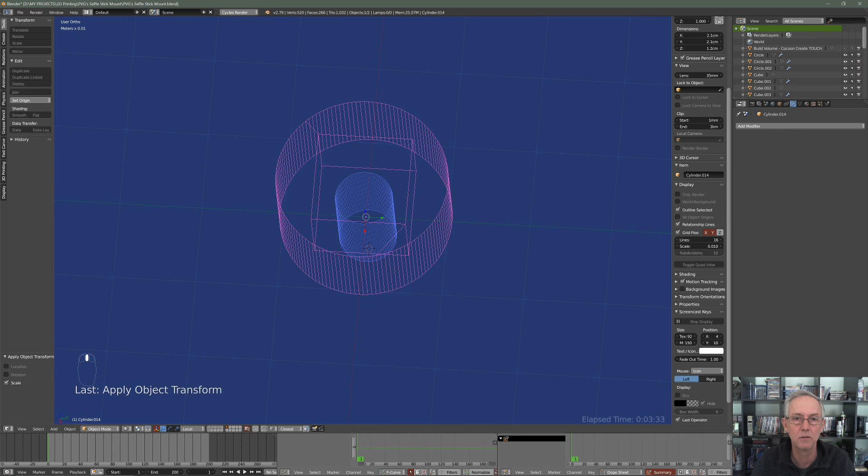Now I need to put a 7mm hole in the base of this, so I'm going to create another cylinder, and its radius is going to be 3.5 millimeters. Snap it to the center, and I'll make sure I've applied the scale. It was fine, but just in case there's any issues on those two objects, because sometimes when you do a boolean, if the scale is not at 1 for each of these objects, you can have issues.

If I was to create this shape and then scale it to this size and then start the boolean, I could have problems if I don't apply the scale. So we'll do another boolean operation, difference, carve, and select the cylinder. You can see that's been cut out of there. Apply that, and I can delete that as my tool. So that's what I'm looking for.

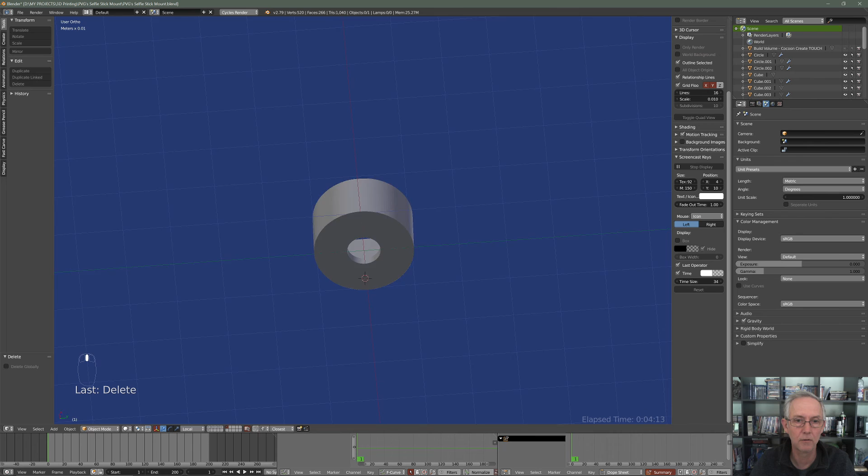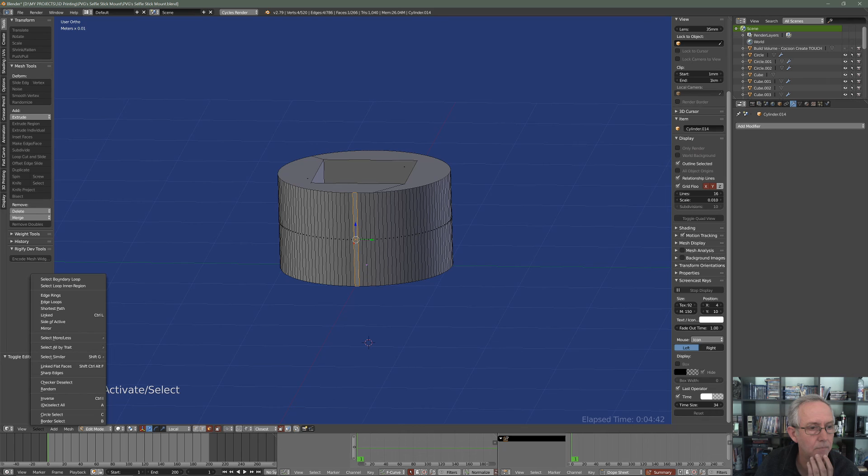Now, to give it some grip, I might extrude some of these faces. I wonder if I can select - I was hoping there was a way I could just select every second face in the loop, but it's looking like I can't do that. Or can I? No.

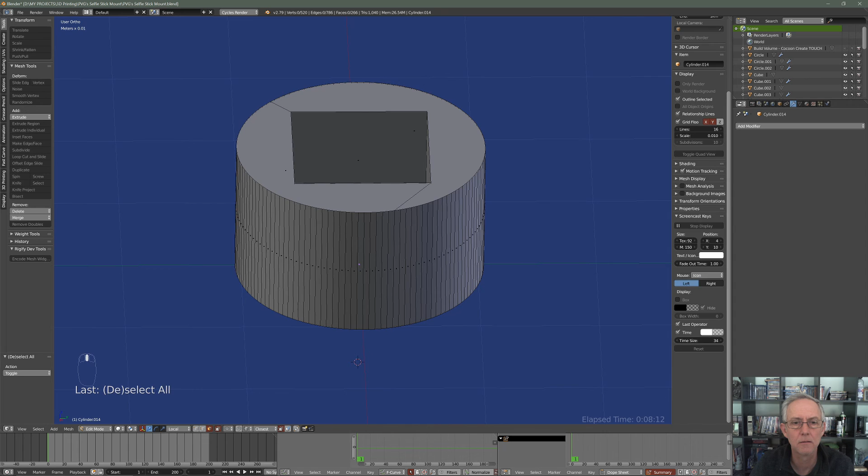So let's see how this works out. I'm going to select - I want to create some ribbing on the side here. I'm going to select 3 faces, skip 1, 3, skip 1, 3, and so on, and go all around the edge doing that. Lucked out there, that works out perfectly.

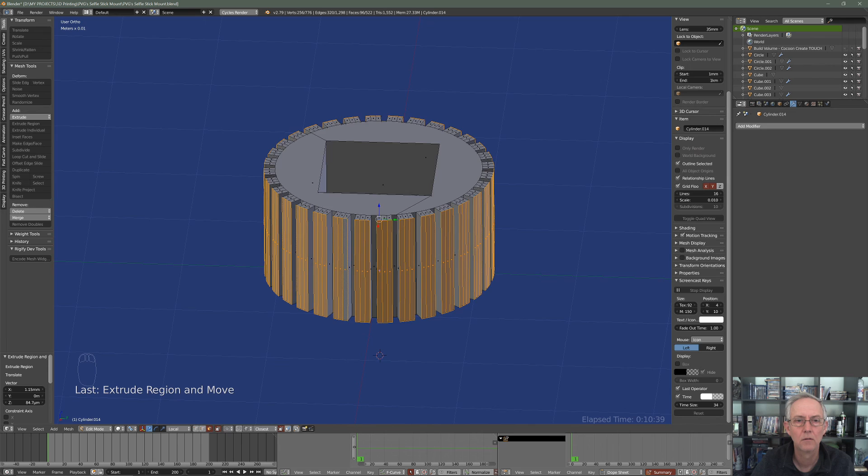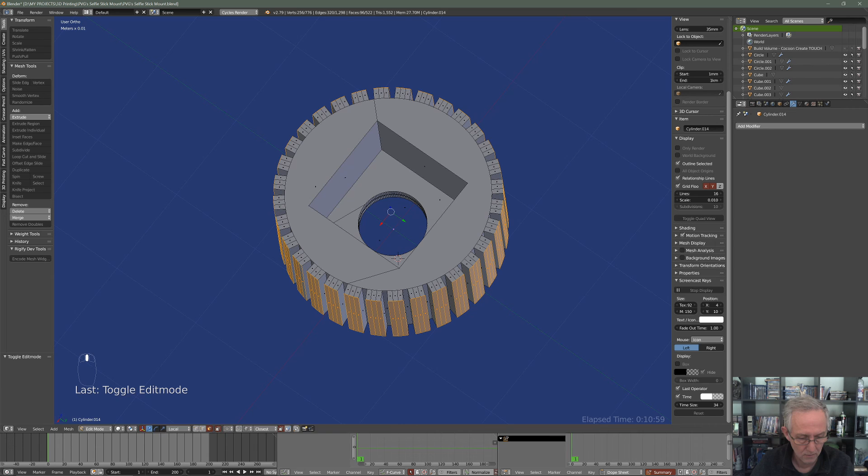Okay, so with those selected, I'm going to click extrude region and just extrude those out. That'll give me a little bit of grip there on the actual dial. That's probably a bit too much, so let's just back that off a little bit. I'll go back to median point, S, Shift Z, and I think that's fine. That will give me a little bit of grip to grip the knob when I'm turning and tightening. Alright, let's print that and see how it looks.

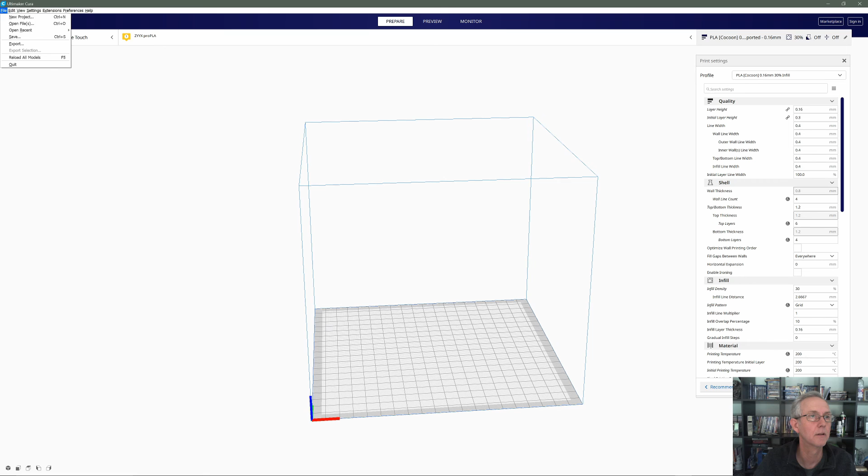So we'll take that out to an STL file, selection only, scale 1000, and scene units ticked, and we'll call this knob for selfie stick. Export that. Now with Cura loaded, let's open that file, the knob - that's it there.

I'm going to adjust the scale to 99.45% on the X and Y. You don't have to do this, this is just for my printer. It's a little bit out on its scaling, and this just corrects to make sure that it prints 1:1.

And I'm going to print 0.16 layer height. What's infill? I'm going to make it 100%, I want this to be solid, no infill. Let's slice that. 28 minutes. And that's how it's going to look.

Yep, so that's all holding up nicely. That should print fine. So I'll save that to file and print that, and I'll just show you my settings so that you can freeze frame if you like, and see what settings I'm using to print this particular piece. Okay, let's print it.